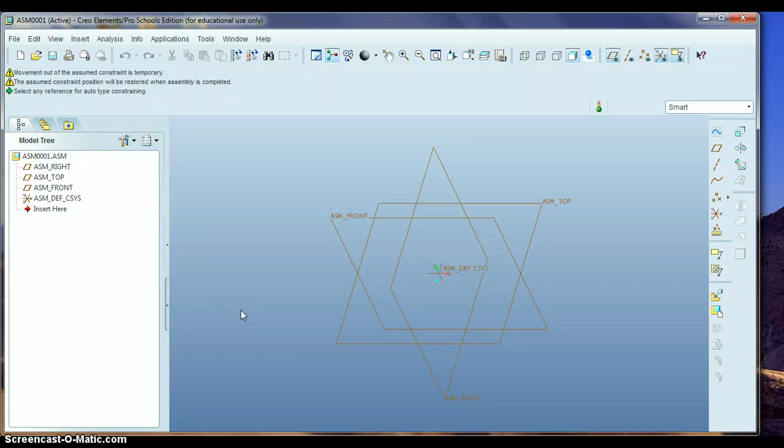There's not as easy a way to assemble some of these parts, like a round peg and a hole. We can line those up pretty easily like we did in that very first primer tutorial at the beginning of the year. These take a little bit of work to get together.

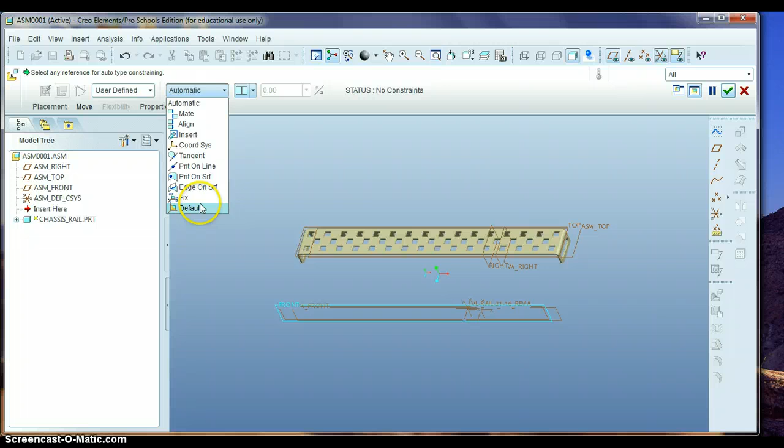But anyway, let's do the chassis rail. We'll bring that in and start with a bearing flat. I'm going to set it down, set it to default, and hit the check mark. If we didn't do that, not a big deal. I'm going to turn off the X, Y, Z coordinates and the datum planes. Now I'm going to bring in the bearing flat.

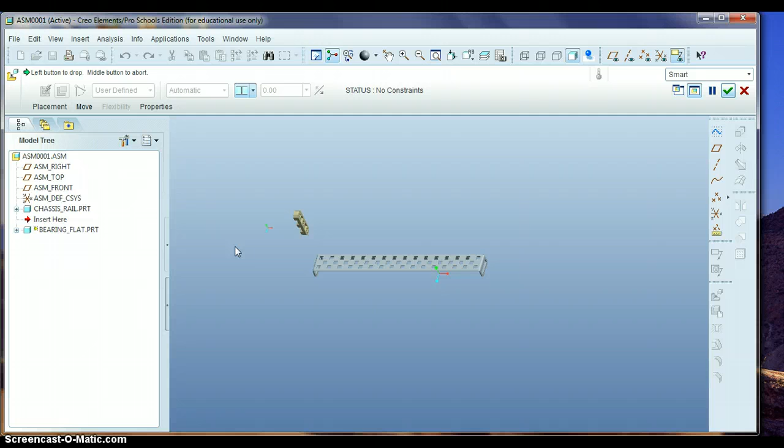A little bit about what this piece is: a little plastic piece that allows you to support the gears and an axle, and allows the axle to spin freely in there.

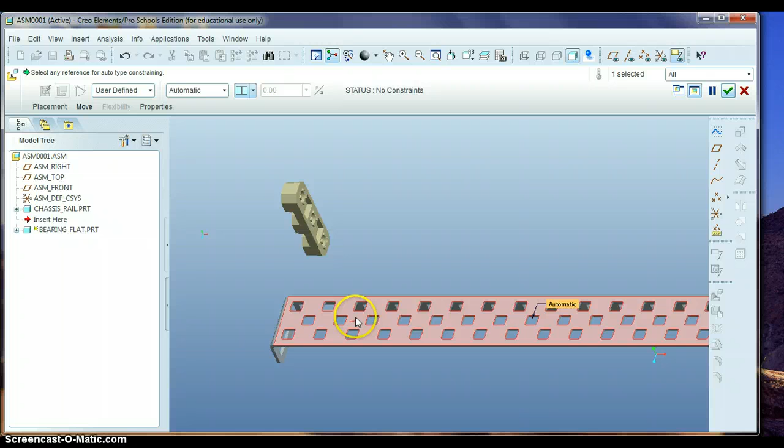I'm going to zoom in. I want to align this face and this face right here, so I'll click on this face of the chassis rail and the underside of the bearing flat. If I turn this to the side here, the surfaces should align now.

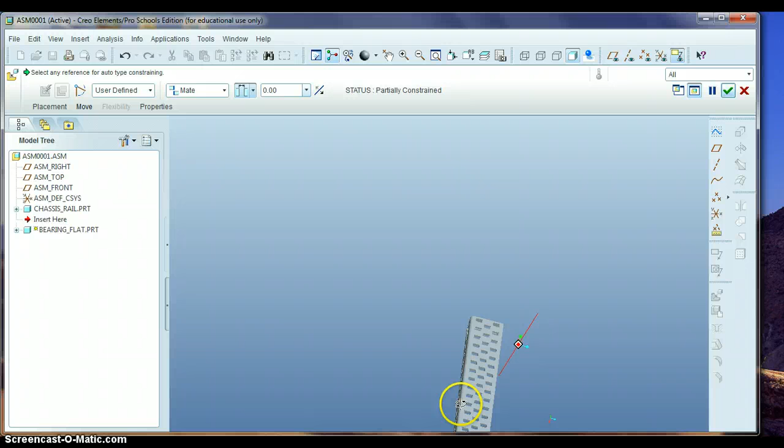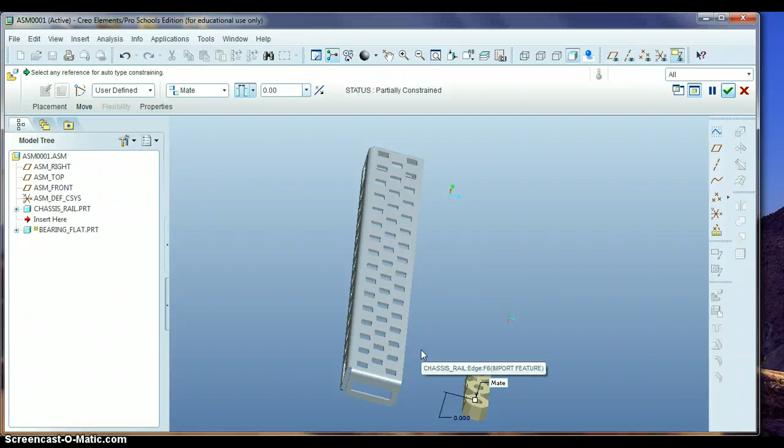Now what the instructions want is for us to get the center hole on the fourth hole here in the middle of the chassis rail. The problem is this is a round hole and this is a square hole, so they don't align too easily. A really easy way to work around that: hold down Control and Alt, then hold down the right mouse button, and you can slide this around.

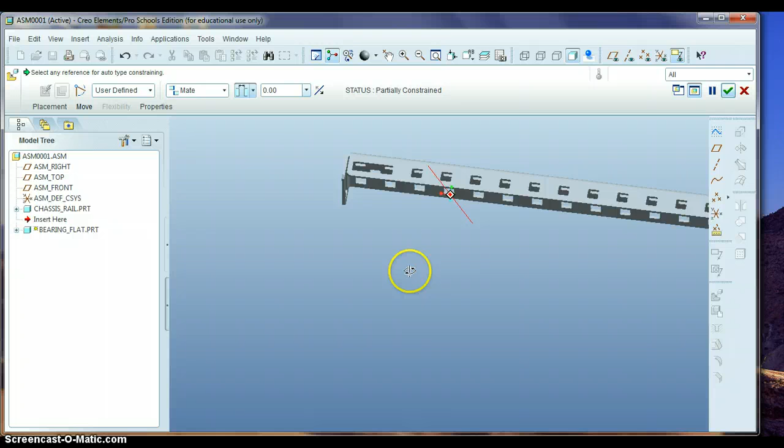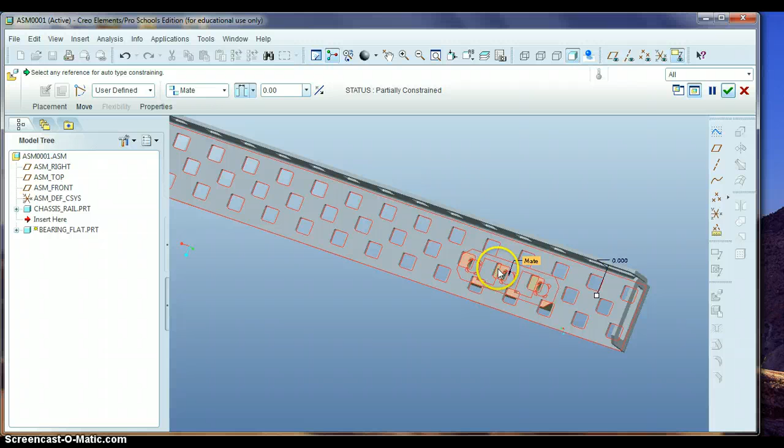Let me go to the underside here. Sorry, there's a little bit of lag on my computer, I hope the video doesn't lag as much as this is doing right now. Anyway, Control Alt right mouse button - here's the second, third hole, here's the fourth hole, and I want this center hole aligned with the first, second, third, fourth hole in the middle here.

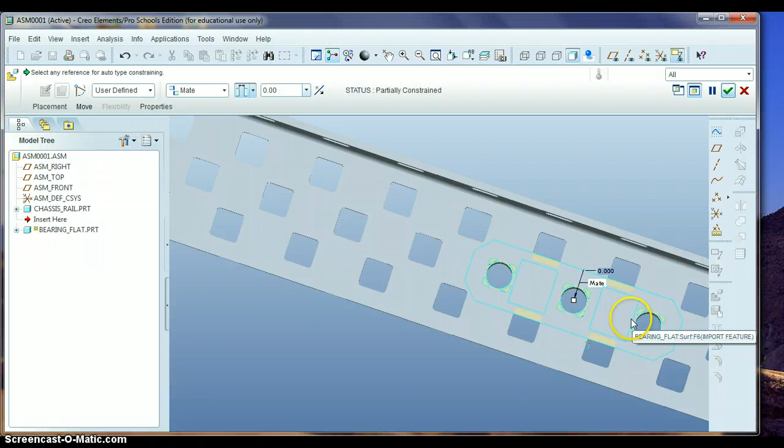I'm going to take a look at this. Looks pretty good, all three holes are kind of aligned here. Everything looks good, so I'm going to hit the green check mark. There's one bearing flat.

Now it wants us to add another one here, so the process just repeats itself. After that, we're going to bring in some of the little screws to hold it together.

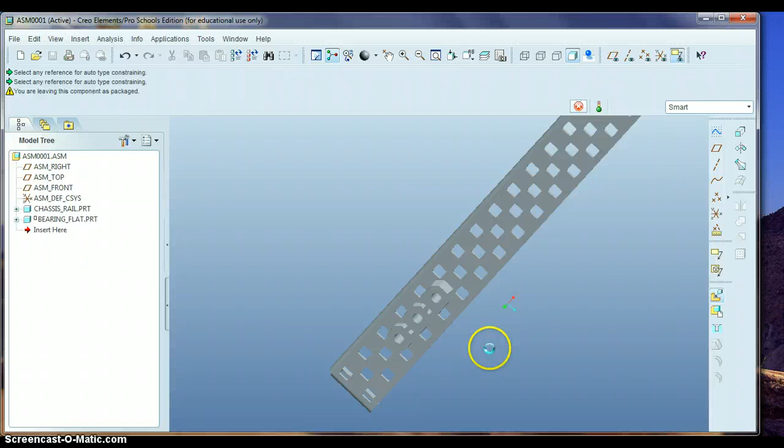So now we need to find the screws - it's the 8-32 hex screw, and I believe it might be this one right here. Let's hit open. We want the longer of the two screws there, they're the same diameter, one's just a little longer. So this one should be a little easier.

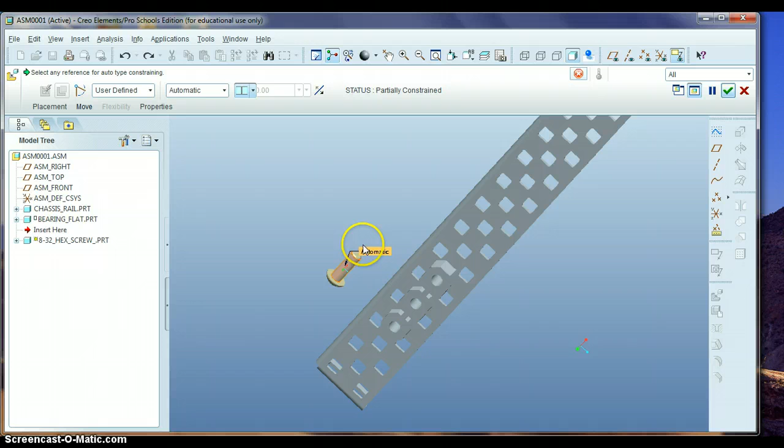We want to align this part of the screw with the inside of this hole. Let's undo that and twist it around just a little bit here using Control Alt and the center wheel.

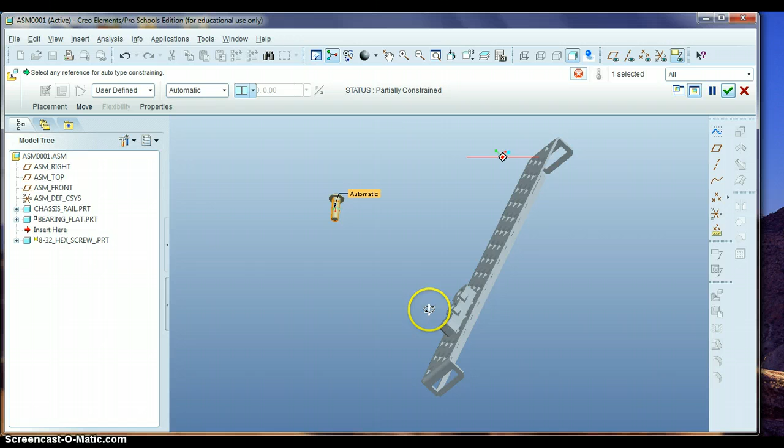Sorry, my computer's lagging quite a bit today and it's messing me up a little. Let's see if we can get this twisted around a little more. It's starting to go. So again, this part of the screw - see if it'll turn, there it goes - and the inside of the hole. There we go, now we're aligned.

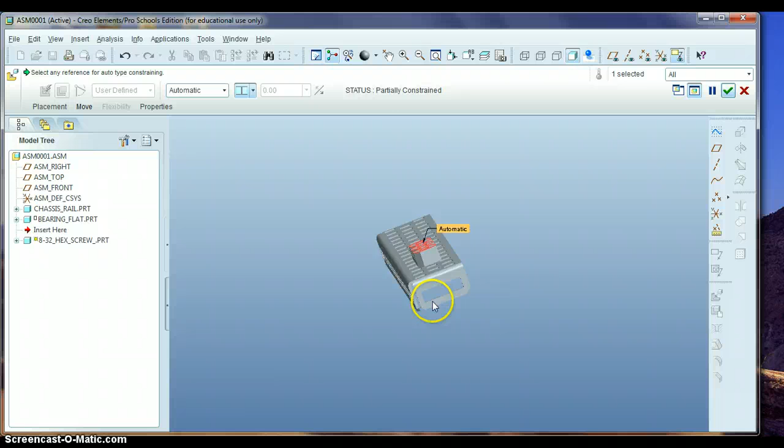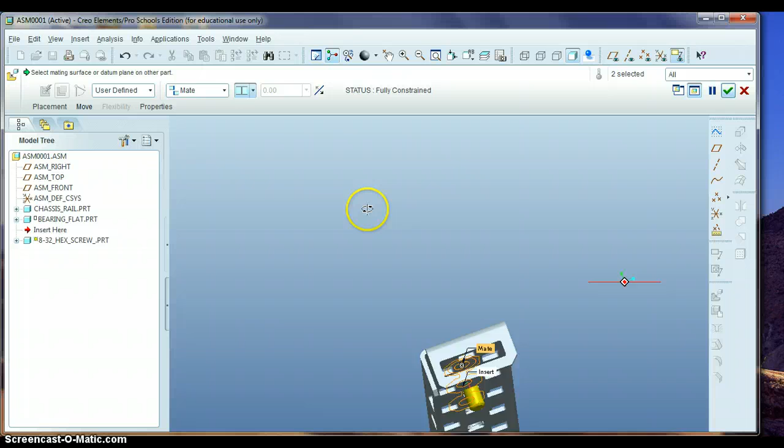We have this set up the way we want it, and the next step is to mate this surface of the bearing flat and this underside of the screw. We get that mated, and need to either change this to 0 or click on this to make it match up. Then we hit the green check mark, and boom, there it is.

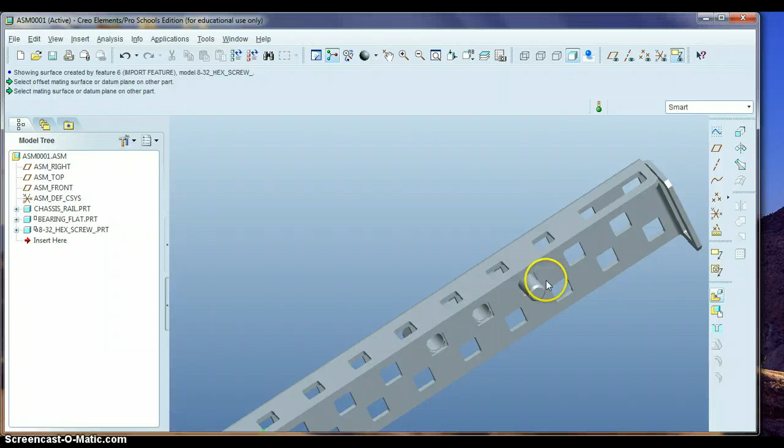So we have that screw in there, and the last part we'll have to do - there's going to be another one here, and then two on the other bearing flat, and so on. But let's bring in the Keps nut. If you want to see what a Keps nut is, I'll be happy to show you sometime.

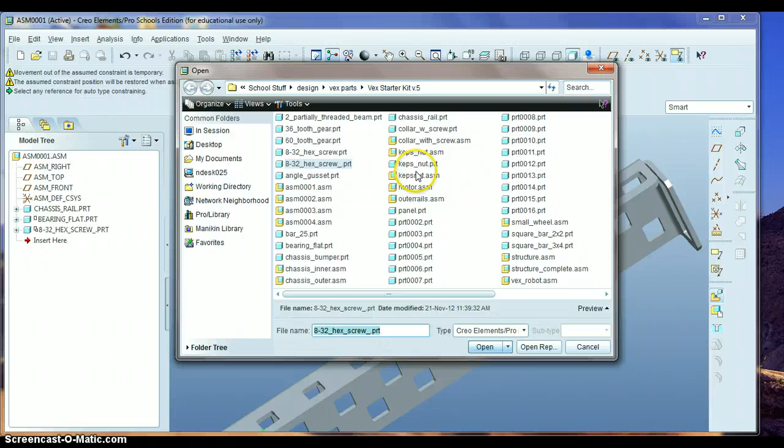There it is. The Keps nut is nothing more than a nut with kind of a washer attached to it, to hopefully keep it from coming loose. Alright, to get this to fit on here, we hold Control Alt and the middle mouse wheel to rotate it around, click on the inside of the nut, and then the outside here of the screw, and that'll align them.

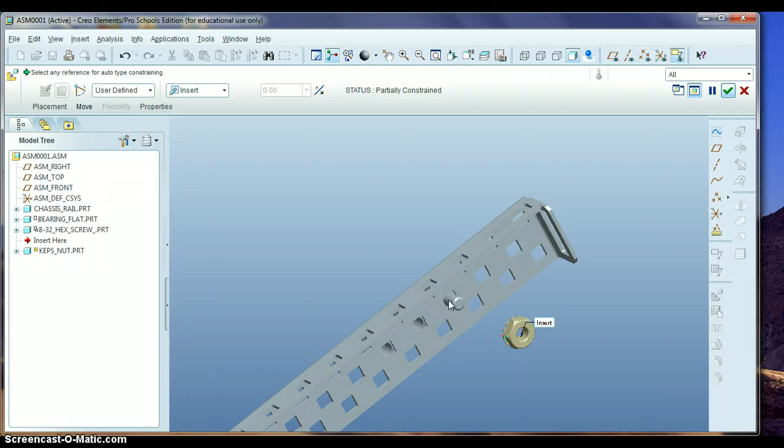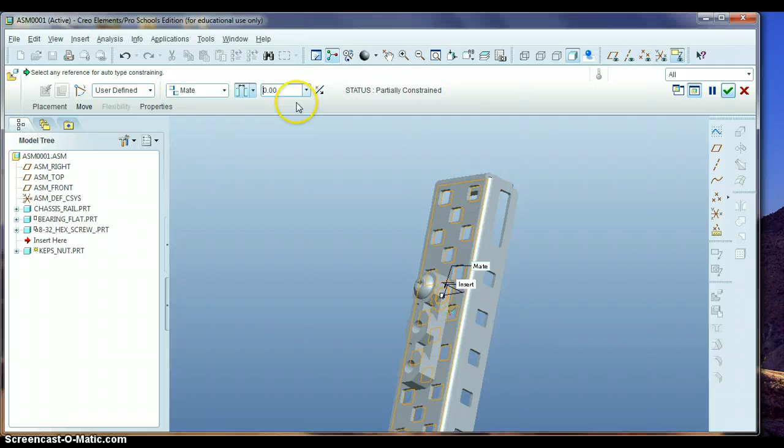And then it's just a matter of mating this face of the chassis rail against this face right here of the Keps nut. Again, we can just change that number to 0. And bam, there it goes.

So that's the basics of this, and if you have any questions, please feel free to ask.